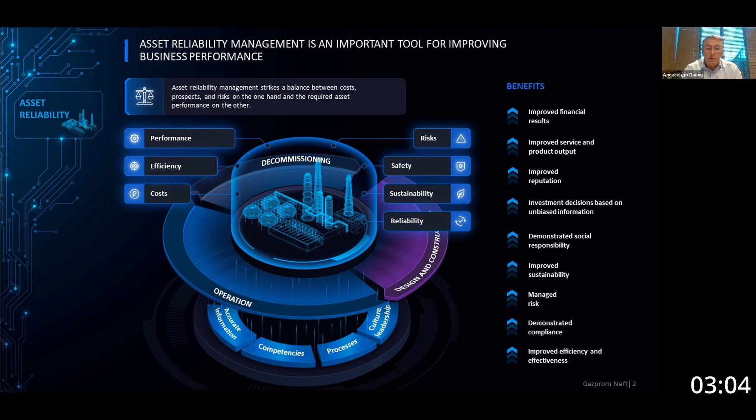Next slide, please. The intensive development of the reliability management system in the division started in 2017. Here I will show you history from 2017, when our corporate center made this functionality a separate focus area. During this period, the Performance Management Center was established. And it was in the center that we have a special unit dealing with reliability management. At the moment, we started up the monitoring of critical deviations along the entire value chain, and our specialists began to develop a risk-based reliability management methodology for our refineries.

In 2020, we began and have now completed drawing up a technical policy of asset reliability improvement. It describes uniform requirements to equipment maintenance and reliability not only at the refineries but also at all subsidiaries that are in the perimeter of our division. Much painstaking work was required to write this technical policy, but today we already have the final version of the document. In parallel, we began to build business processes.

Today, we are actively working on the development of reliability management systems and conducting performance analysis using balanced key performance indicators. In the future, we are planning to expand the existing functionality and establish an asset reliability management center. The main tasks of the center will be to ensure compliance with the uniform principles of the technical policy and the methodology requirements at all stages of the asset life cycle, to design and develop a reliability management system for the downstream division, analysis, goal setting, and performance improvement of the reliability management system.

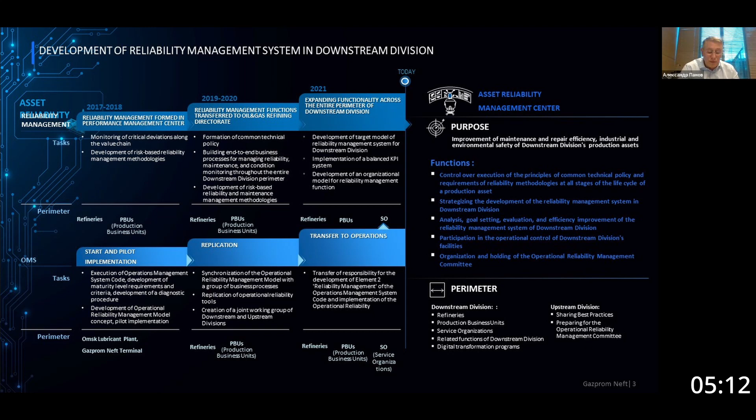There is another important element that we have developed and apply as a quality tool. It's a constant search for the best practices not only within our company but across our industry. Next slide, please. For the comprehensive approach development, we set ourselves the following goals that directly affect the efficiency of the facility operation. These are improvement of industrial and environmental safety, enhancement of asset operational availability, and reduction in the cost for maintenance and repair. To achieve these goals, we have developed a target model for managing business processes, and we are updating it as a part of the development of our competencies in reliability management.

The transformation of business processes cannot be realized without the transformation of the organizational structure. Therefore, attention and evaluation and the importance of the organizational structure directly affect the quality of reliability management. That's why we are currently developing a target model of the organizational structure of assets, which will allow us to effectively manage the processes related to the improvement of reliability and maintenance of the equipment. And another key task in the implementation of the comprehensive approach is the development of IT tools that help to automate reliability and maintenance management process.

The solutions implemented have already proved their effectiveness. But today we have an understanding that these solutions have additional potential. We are constantly working, meeting with companies that offer us solutions to raise the automation using more advanced tools. And we are also developing the functionality of the existing systems, such as Satura and Meridium. Once again, I'd like to emphasize what the comprehensiveness of our approach is. That is the solution to three main tasks. These are the target business processes, the organizational structure for the business processes, and the tools that support these business processes.

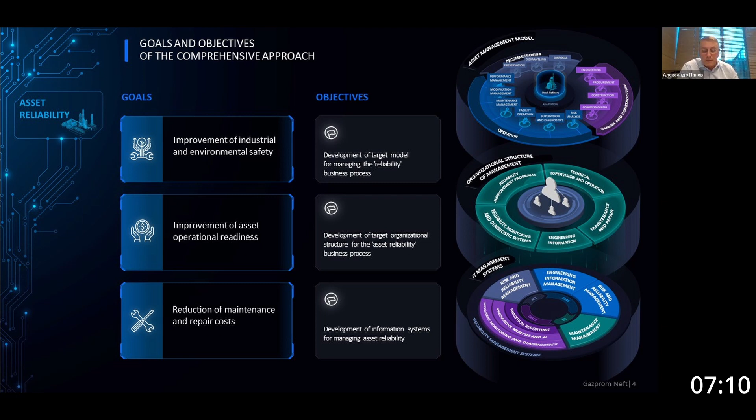Next slide, please. While implementing the comprehensive approach, we are guided by specific principles when building a reliability management model. This allows us to ensure the manageability and transparency of the implemented business processes. What are these principles? They are unified requirements and approaches to reliability assurance in the division.

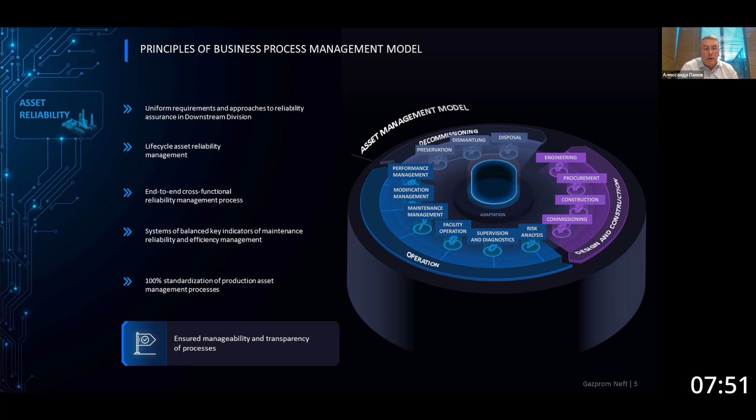Asset reliability management throughout the life cycle, which is very important. Also, end-to-end cross-functional reliability management processes, systems of balanced key indicators for managing reliability and maintenance efficiency, and 100% standardization of asset management procedures. Next slide, please.

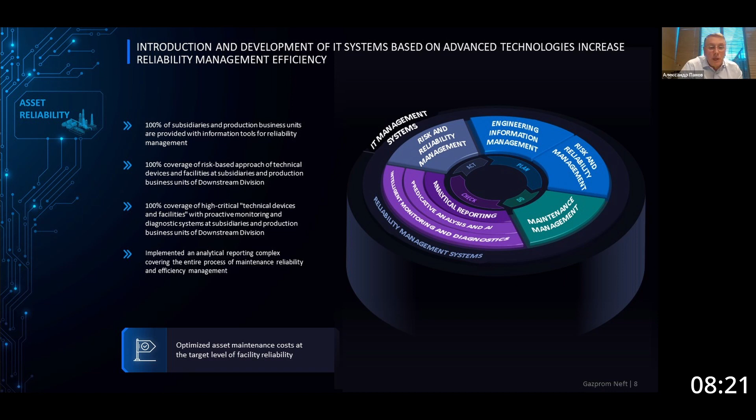Next slide, please. The development and replication of IT systems based on advanced technologies is a key task when building a comprehensive approach. In today's environment, you cannot build a complete reliability system without having automated maintenance and reliability management systems. These tools are rapidly developing all over the world. As I said before, there are a lot of offers on the market today that can bring you to a whole new level. And this wide choice of solutions has determined for us a certain strategy for further moves.

First, today, those systems that have already been implemented on our assets. These are Satura and 1C, and we continue to expand and improve them. We also use such tools as Meridium. We also plan to develop it. At the same time, today we focus on the use of tools that forecast, predict possible equipment failures, and so-called predictive analytics. These are fundamental systems that you, Andrei, are engaged in, diagnostic and monitoring systems that are the basic sources of information. And today we have a certain portfolio of these solutions, which we are implementing through a specially created program called the Reliability Management Program.

Today, the tools that have already been implemented or tested bring tangible results. And even though we have not yet fully utilized the entire range of tools, even at this stage, they allow us to optimize costs for repair and maintenance and the like.

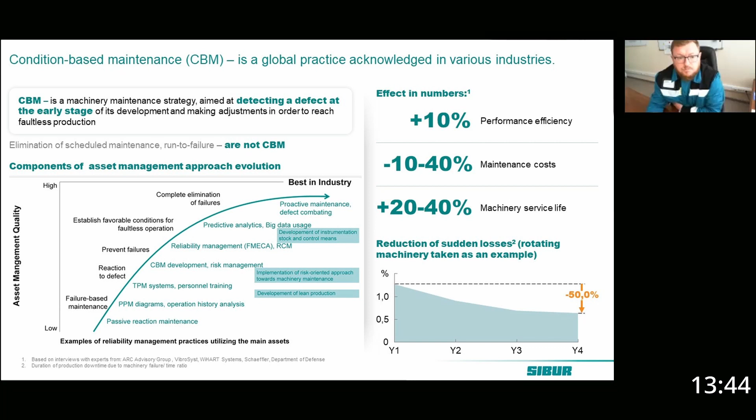Why is condition-based maintenance so important for a company? As a business, we can see the economic effect obtained by implementing this strategy, including better performance. Our company actively uses different performance-boosting tools, such as choosing better actions in accordance with the risk-oriented approach based on risk analysis, adjusting time frames for each action through motion study and personnel training, additional equipping of maintenance shops with modern diagnostic and maintenance instruments and tools, and implementing new initiatives as part of the digitalization project.

I'm going to talk about that one later. As I said before, the estimated economical effect is fewer man-hours, but also moving to CBM will result in more inspections, up to 30%, but fewer scheduled preventive maintenance tasks, up to 20%. As a result, we achieve better performance of the maintenance staff, up to 5-10%.

If we take our company as an example, we saw how global companies struggle with the current situation at one of our plants where we switched to this new maintenance strategy. The number of failures at machinery switched to CBM at one of our plants - in a few years, we predict it will reduce roughly by 44%. That's quite a good number. I'm pretty sure we're gonna reach it.

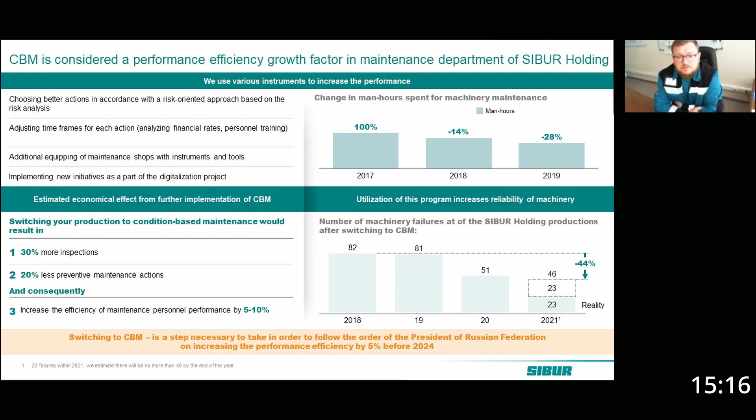Why are we so sure that moving to CBM would improve reliability and wouldn't cause more failures? First of all, right now we use CBM with machinery with a low criticality rating. And for each piece of machinery, we assign its risk level. In order to do that, we developed our corporate standard.

Machinery with lower criticality ratings we consider for switching to CBM. For that purpose, we use the system called Meridium, which uses algorithms for determining an optimal maintenance strategy. The basic algorithm is determining types of failures for each component of a machine. Then, for each failure, we determine its model, characteristics, and effects, and then we choose the best maintenance strategy for failure prevention.

To actually follow those recommendations in terms of moving to CBM, we have to perform more inspections and diagnostics of machinery state. In order to find the right maintenance strategy, Meridium also uses instruments such as a decision tree. In the basic strategy selection, in accordance with the decision tree, a machinery specialist has to answer the given questions to make a decision. That helps them find the best maintenance strategy.

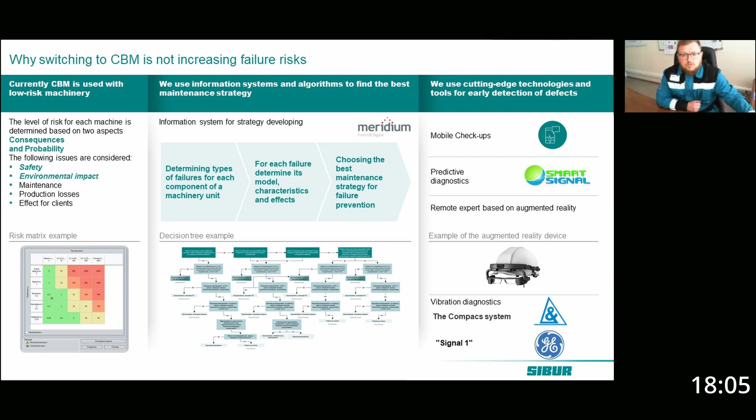Greetings everyone, thank you for the opportunity to take part in this conference. Thanks to the hosts. While the presentation is launching, I will briefly say that in the presentation I would like to provide insights into our experience of implementing risk-based management without deep immersion, but I think it will be interesting. We will tell our approaches, future plans, our way up, what we should pay attention to, what difficulties we faced during the implementation.

I think a lot of people had them.

Let's start. I represent the company KazMunayGas, Kazakhstan, the oil refining unit directly, and would like to share my experience implementing the risk-based approach to managing equipment reliability and integrity.

We will briefly go through the strategies and history. I will show an example of how we moved to the risk assessment system, the metrics, the outcomes from the use of COMPACS system. We surely have them, we have something to show you. We will also highlight the problem of our legislation as well as further steps regarding the working interface.

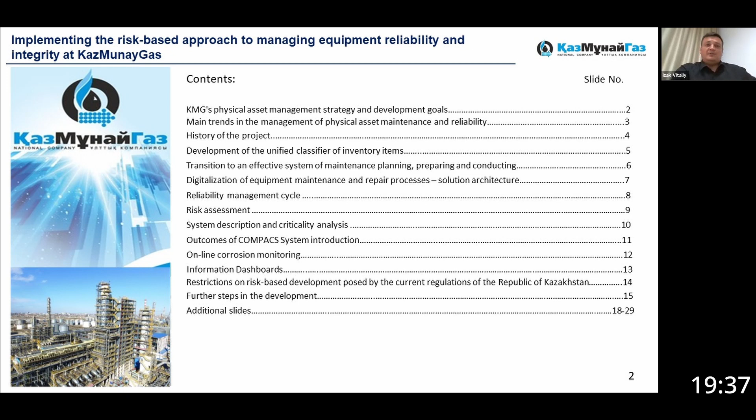On this slide, I would like to show the strategy. This is a direct transition to an effective system of planning, the preparation of repairs, creating a single unified risk-oriented system for managing assets maintenance and reliability at our plants, the transformation and digitalization of the asset maintenance and reliability management processes and the reliability of manufactured assets, and the efficient use of company finances for maintenance without compromising the equipment's safety and availability.

We have set the following goals. The first one, increase the overhaul interval and change the repair cycle structure at Kazakhstan's refineries. The second, reduce the production risks and increase the predictability of the equipment health.

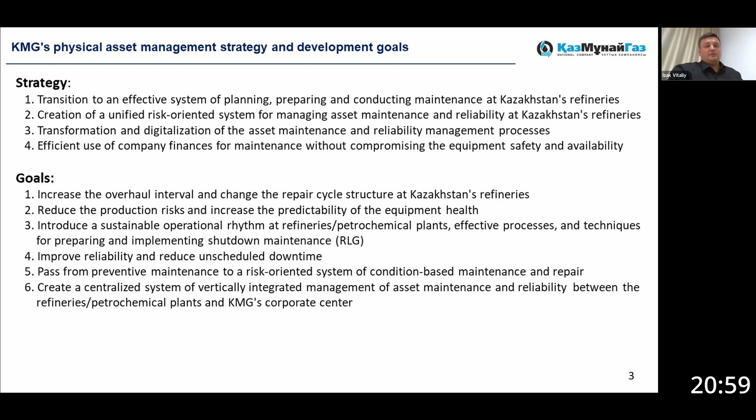The third, introduce a sustainable operational rhythm at refineries and petrochemical plants, effective processes and techniques for preparing and implementing shutdown maintenance, improve reliability and reduce unscheduled downtime, pass from preventive maintenance to a risk-oriented system of condition-based maintenance and repair. We've also got a goal to create a centralized system of vertically integrated management of asset maintenance and reliability.

Next slide, please. It's worth noting the main trends in the management of physical asset maintenance and reliability. One cannot mention the technologies without mentioning people. Here we always focus on people.

What we are doing in this direction, we organize a system of theoretical and practical training and support in the workplace. Here we use such methodologists as representatives of Canada and company RLG, the Russian company Maintex, and a part of IBM and, of course, Honeywell.

We have implemented courses to improve the technical literacy of operational staff. One of our enterprises is currently implementing its own training center, which will train employees, improve their literacy in the management service, reliability in digital solutions, taking into account new business processes.

We unified the organizational management structure where we learned the practices of Honeywell. They acted as consultants. We adapted it, partially changed it, but nevertheless unification happened. In terms of performance management, there are obviously metrics and the efficiency system.

In terms of technology, we are also implementing projects on computer simulators because its operation also significantly affects the reliability of equipment. The system of preparation and carrying out repairs has given its results.

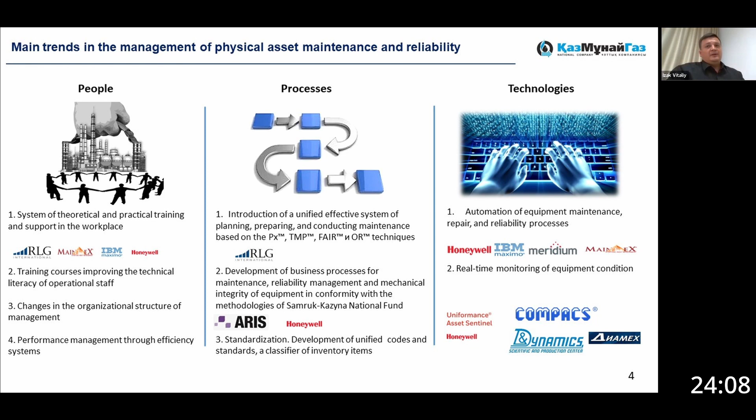Next slide, please. On this slide, I want to present our path. It's not described here fully, but there's the main milestones that we have had since 2014. We have currently developing and moving on.

At the preparatory stage, we performed an independent equipment condition audit for the refinery's transition to an extended overhaul period, developed a preliminary national standard for extended overhaul cycle of operation, since the Volgograd regulations from 1987 on plant preventive maintenance were previously in force.

We developed specifications regulating inventory levels, about 12 standards. Now they have become the state standards.

Based on the results of the audit, we developed programs for the replacement of critical equipment units and pipelines, and implemented them. In the period of 2017 and beyond, we moved to the introduction of digital solutions, developed and modeled business processes, unified organizational structures, and conducted systematic theoretical and practical training of employees in new processes and solutions. We also introduced a single unified classifier. In 2019, we completed the process of implementing the classifiers, and we are currently summarizing the database.

I will not talk in detail about ISO 14224 — I suppose everyone knows it. The asset register is being formed, though it's impossible to say it's formed at 100%, because its depth equals the quality of the source data. This is a continuous process of improvement, since assets are changing, and their depth is constantly improving with the growth of the company's maturity level.

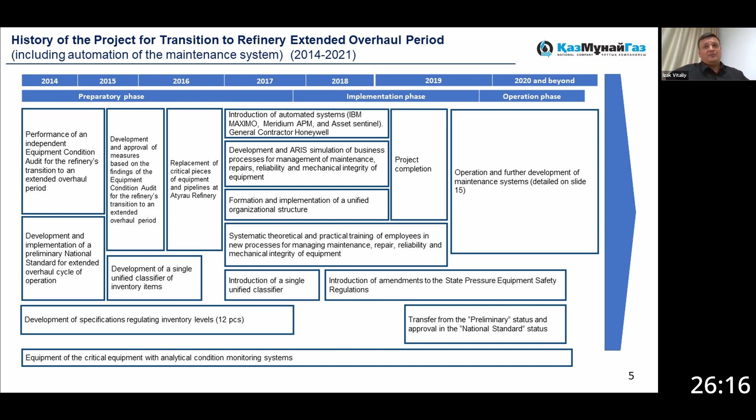We also engaged in changing the industry's regulatory and legal acts for state pressure equipment safety regulations. It's designed for the entire industry and limits us. Further, I will briefly talk about this.

As for the unified classifier, in fact this is a sustained effort, and in my opinion it's about 20% of the transition to digitalization of repair processes and reliability. It's impossible to implement solutions without proper regulatory and reference information. What we have done within this project: we made up a classifier and a reference book, and developed a system.

This is a system of classification and coding of functional locations and equipment items. There is a tree-like structure of the basic classifier, with templates for a class or subclass, group or subgroup of nomenclatures, indicating the properties and their values. We have developed regulations for filling in the classifier and reference book of inventory items.

According to the results of data collection at 3 refineries, reference books were obtained. In total, we had more than 100,000 entries during the audit. When we evaluated warehouses and existing directories, there were more than 100,000 nomenclatures; when they were brought to a single name, we had about 18,000 unified nomenclatures left. That is, the duplication and quality of the original data appeared numerous times. Below we listed the groups into which the classifier was divided.

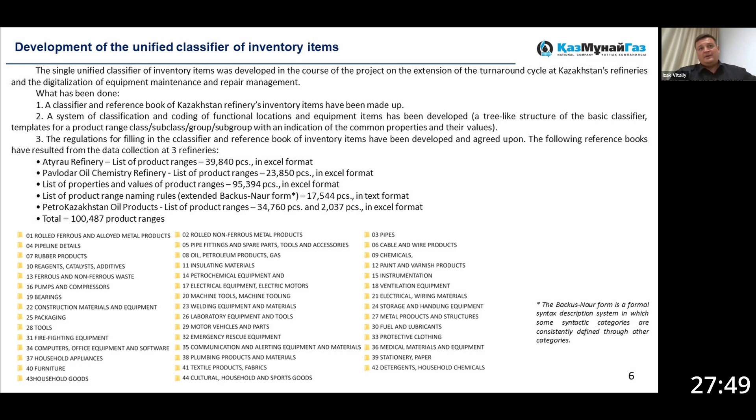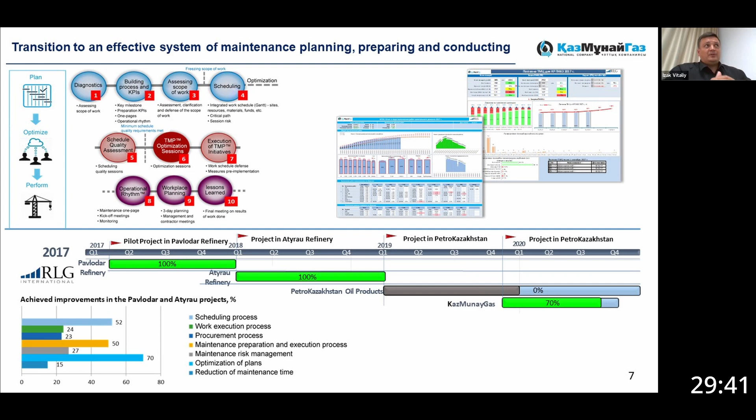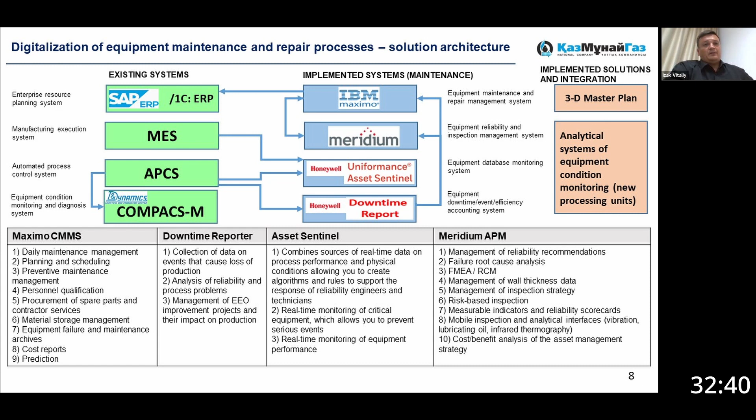Let's just say that the overall efficiency of the equipment is a complex but fundamental indicator. We are still setting it up, but we ensure that it works with high-quality source data. I suppose it makes no sense to present Meridium APM. Everyone already knows it. Next slide, please.

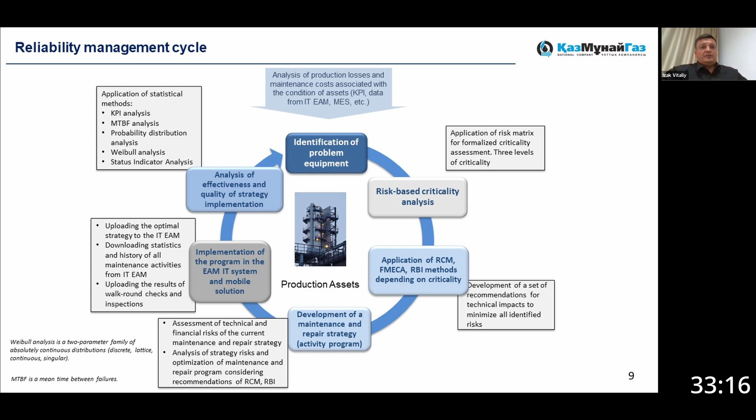Perhaps not all attendees know what a reliability management cycle is. I would like to tell you how we use it, but it's probably the same for everyone. We identify problem equipment, conduct a risk-based criticality analysis, and apply the RCM, FMECA, and RBI methods depending on the criticality. Based on this, we develop maintenance and repair strategies, and then there is always an analysis of the effectiveness and quality of the strategy implementation.

Here, I would like to share my personal opinion, ironical perhaps, but they calculate their financial benefits from the implementation, and projects from similar ones justify the results. However, in fact, there are only two consequences from a business point of view: cost reduction and increased profitability. All other indicators only show how to achieve this. I think there is no such thing as the safest and most unprofitable in the world. Therefore, it's all about reducing costs, increasing income, and as my colleague said earlier, there should be a balance. The next slide, please.

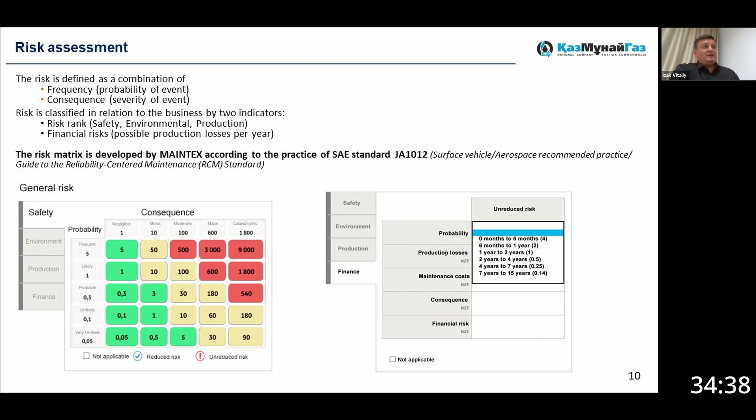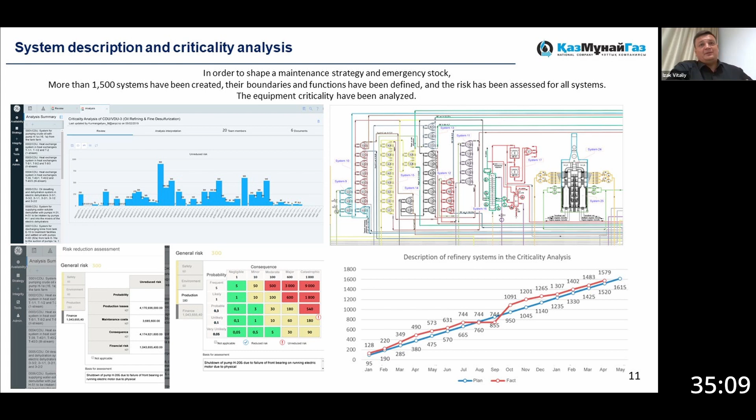This is an example of an Atyrau plant. I would like to show you how these interfaces look, how systems look in the Meridium system, how the criticality is determined, the current status of the data. We follow the path of the initial division of installation into systems, determine the criticality rank of the system, and then in ranks we determine the types of critical equipment. This allows you to optimize the time when performing an analysis of the criticality of the equipment.

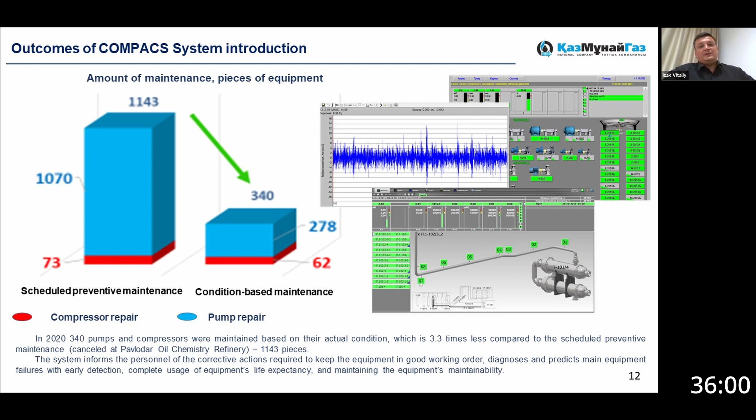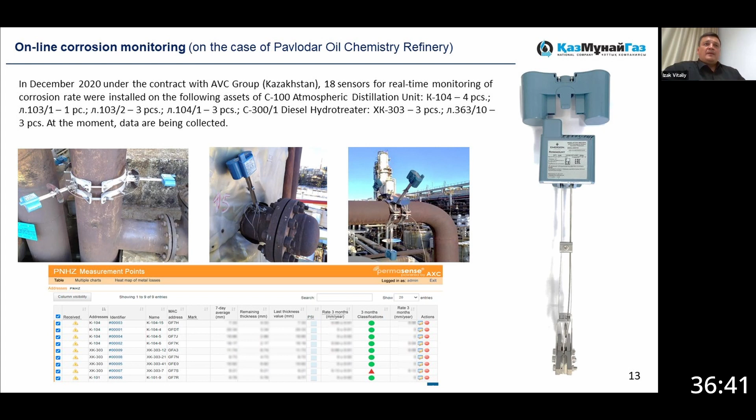Next slide, please. We have developed dashboards for monitoring corrosive agents in raw materials and petroleum products. This is the case study of Pavlodar oil chemistry refinery. Information dashboards are developed in MES and simultaneously display data on the screen in the central remote control room.

Here we see the mass fractions of water in the components, boiler fuel, the content of sulfur, water, nitrogen in hydrogenates as a percentage. This dashboard has key indicators. This allows the responsible person to control the work during operation at the pre-trial stage, and also pursues increases in reliability and reduction of aggressiveness.

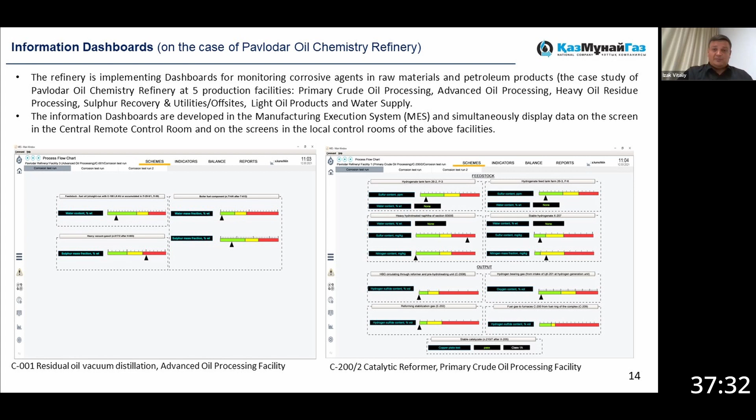Next slide, please. On this slide, I show a big issue that we have faced. These are industry rules that are regulated by our law and set requirements for the entire industry, for those who operate pressure vessels. I think there were similar restrictions in Russia at a certain stage too. In order to check the rate of corrosion and conduct inspections, they require stopping the equipment.

But after 4 years, the Ministry of Emergency Situations has understood the difficulties we face, and this year, in the 4th quarter, we are expecting changes that will functionally allow us to apply processes such as RBI analysis and form inspection schedules based on risk factors, which in the future will help increase the repair intervals in certain cases. Next slide, please.

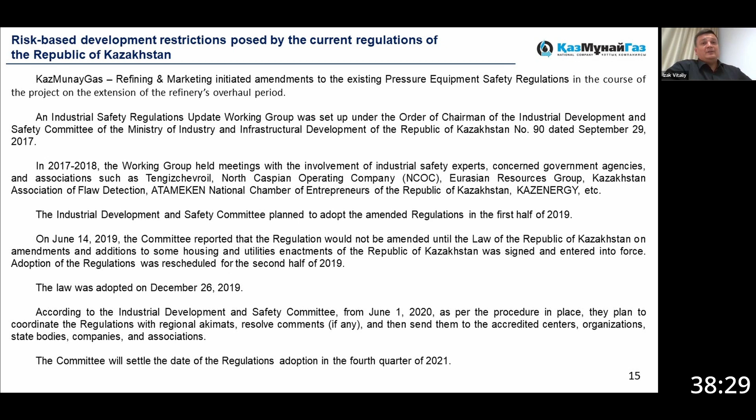The further steps of development. We are not stopping, we are moving, in some cases in parallel, in some cases sequentially, but always in the direction of improvement. We are integrating Maximo with the master plan. This is a laser model, the most accurate. We are engaged in the development of mobile maintenance and repair systems now.

The plans include the development of instrument calibration management in the Meridium system, setting up maintenance and repair management for linear assets in IBM Maximo Linear Asset Manager. This is a large separate layer. So far, I haven't seen that this is well developed. This applies specifically to the management of repairs of pipelines, power lines, railways, highways, all assets of a linear physical structure. Completion of FMECA and RCM analysis on high-risk equipment.

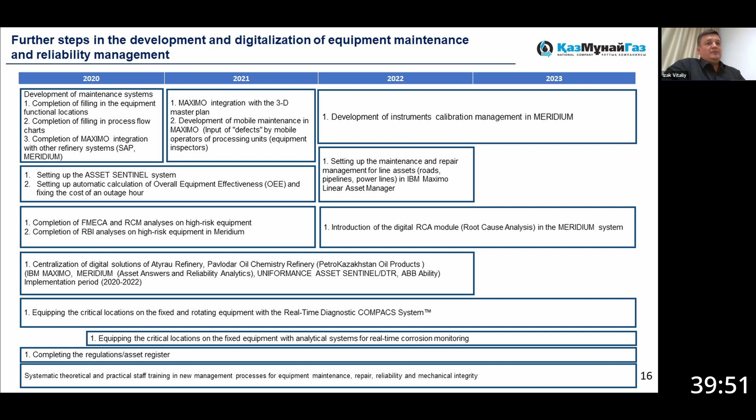Centralization of digital solutions. Here we clearly understand that the Asset Answers product is all about reliability analysis. While we cannot implement it on this platform, we do it on the QlikView platform. We continue to equip critical locations with analytical monitoring systems. This is our long-term plan. We adhere to it, and we are moving in this direction. Next slide, please. This is it.